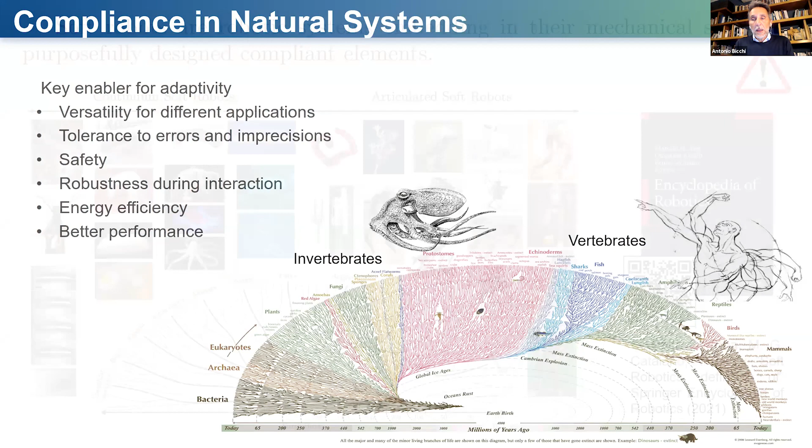There are different definitions of soft robots, but soft robots are machines that basically take inspiration from this ubiquitous feature of nature, having compliance. In a recent definition that Cosimo della Santina, Manuel Catalano, and myself tried to give of soft robotics, we considered that soft robotics can be of different types. Continuum robotics takes inspiration from animals that have no bones, basically invertebrates, while articulated soft robots instead take inspiration from vertebrates.

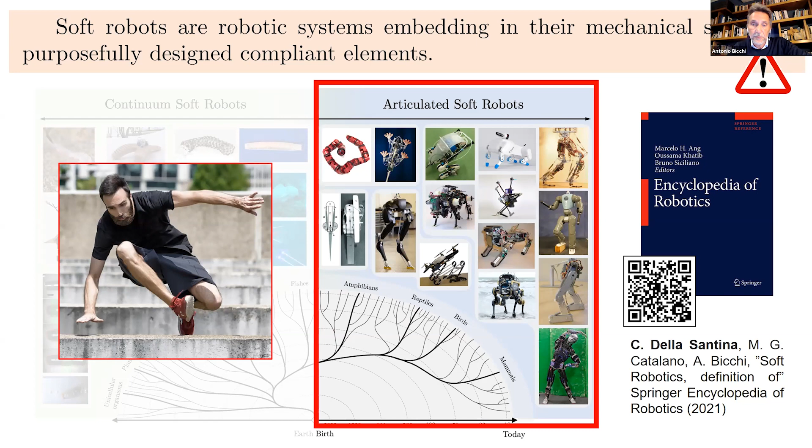In all cases, there are elements that define compliance and interaction. If you look at the human example, we have bones, but we also have muscles, and muscles are inherently compliant. They are characterized by force-deformation, force-velocity, and force-motor neural firing rate relationships. There are descriptive models in the literature, but it's still an open topic to exactly understand how the musculoskeletal system works in humans.

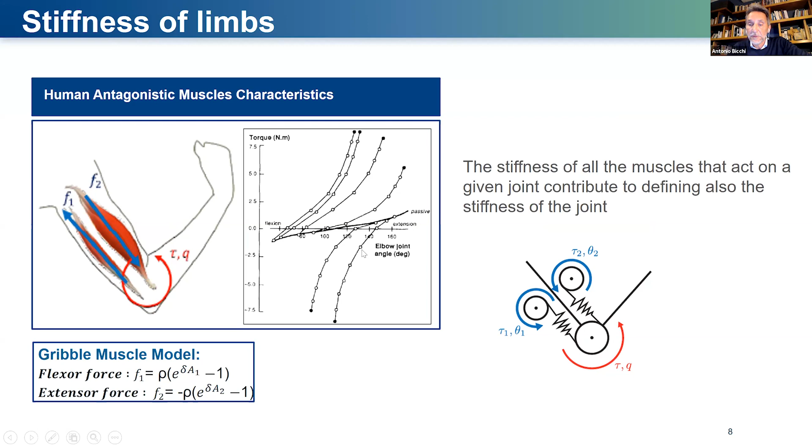The limbs have different stiffness because of their actuation through muscles. If you combine two muscles in an agonistic-antagonistic, push-pull configuration, the characteristics of the two muscles combine so that you can have different stiffnesses at different levels of activation.

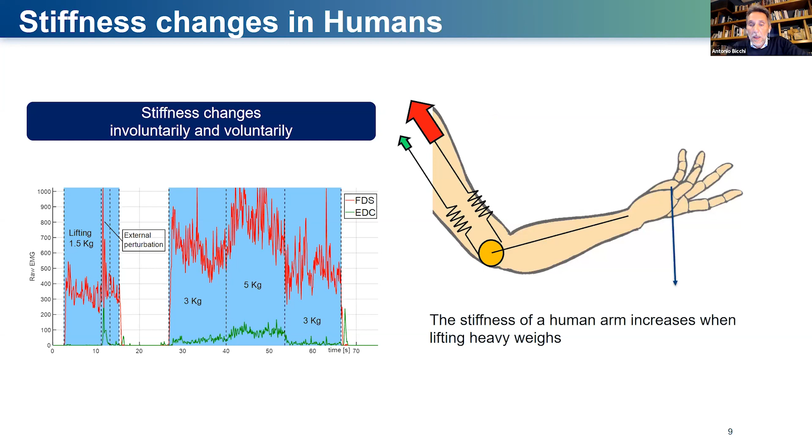Actually, humans change stiffness both voluntarily and involuntarily. When you lift a weight, you stiffen up, not because you want to, but because your system is made so that you increase your stiffness. But on the other hand, you can also change your stiffness without changing position and without having any weight to lift, if you co-contract the muscles in an antagonistic role.

This has been studied largely in the literature, and I'm very happy to have here one of the true pioneers of these studies, Neville Hogan, who as far back as 1984 started looking into this problem. The fact that humans change stiffness, change impedance, and use those changes for interacting with the environment in the proper way has been considered by many.

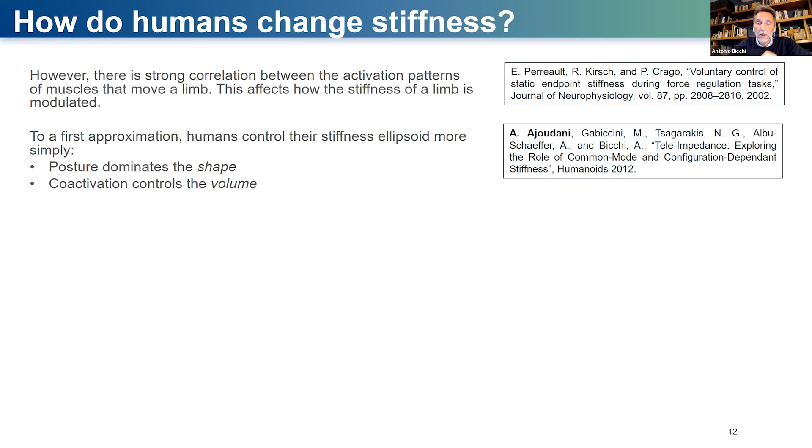So when we contract muscles, we tend to contract all of them together, and it's difficult for us to learn to contract some muscles but not others in the arm. So the configuration-dependent stiffness, as we call it, changes with posture.

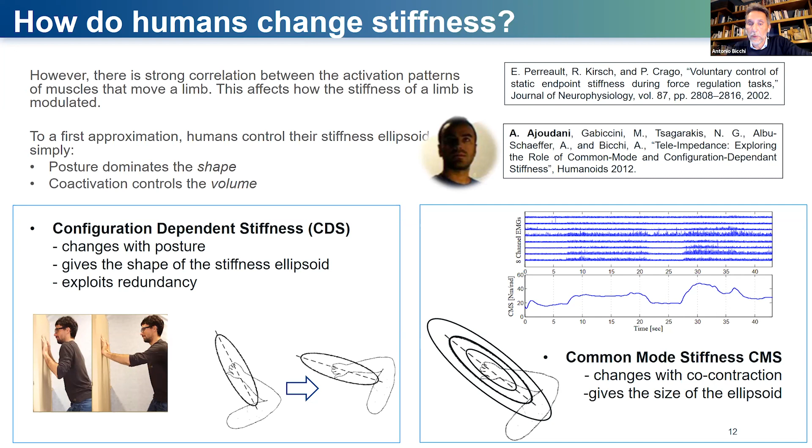This was work by Arash Ajoudani, a former student, now a colleague of mine, who did these interesting experiments where we see how the human ellipsoid, measured by perturbation from a robot arm, changes in size when co-contraction happens, but very little in direction—changing in volume, but not in shape.

Now, this much given about humans, let's see what happens in robots. Variable impedance in robots has been used and proposed for a long time. First, it was proposed and implemented in software with variable impedance control, and then there have been several attempts to also implement it in hardware, in variable impedance actuators.

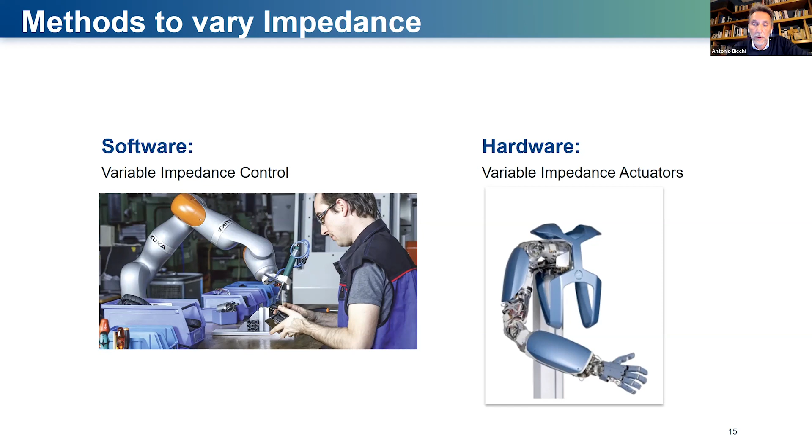Again, we can be inspired by nature and try to replicate that. For instance, I share with you here the design of an actuator that has two smaller motors inside, which you can see on the right, and a connection between elastic elements between them that makes its force-to-torque-to-deformation configuration very similar to the human one.

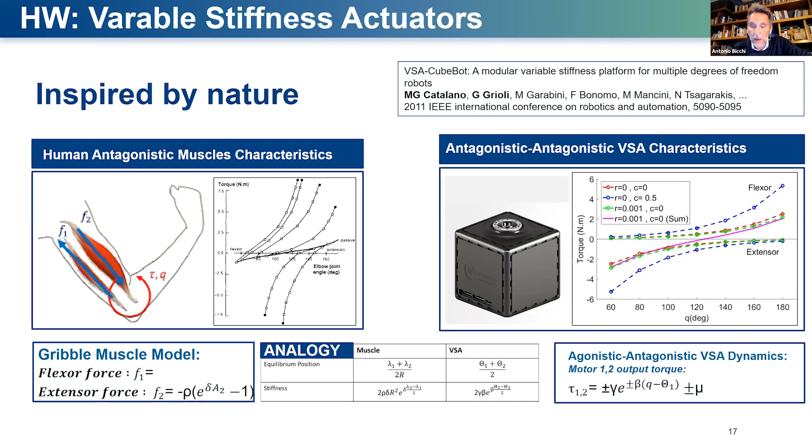By using these actuators, you can actually replicate the human muscle agonist-antagonist system in one degree of freedom. The actuator is actually rather compact, and it's now even a product of a spin-off company that you can use to simulate human impedance. This is work by Manuel Catalano and Giorgio Grioli, whom you see here.

Variable stiffness has been used for rehabilitation, for instance with exoskeletons. I mentioned some work from the University of Brussels for lower extremity exoskeletons. And in our own lab, we have done experiments using these cubes that I showed before for exoskeletons that can change stiffness, but also for this knee.

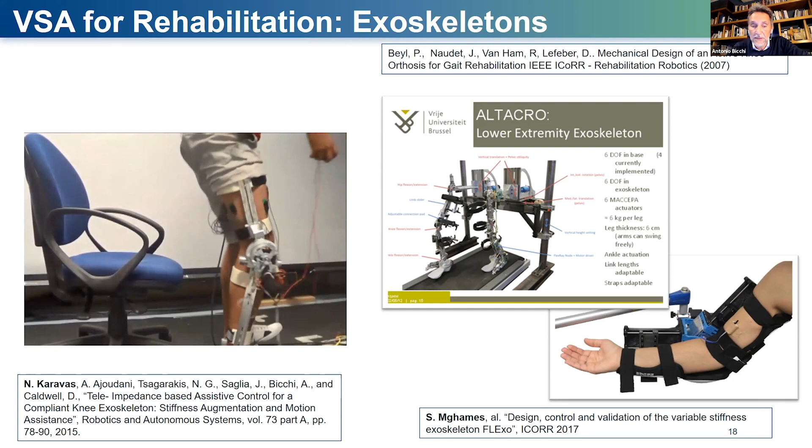In this case, you see that this exoskeleton is used to help the person lift. The idea is that when you need more force at the beginning of the standing up operation, you better have a rather rigid motor because you need to transmit all that torque. While when you are standing, you don't want the motor to mess up with your freedom of moving. You do not need much support, and you want to have as low impedance as possible when you are in the upright position.

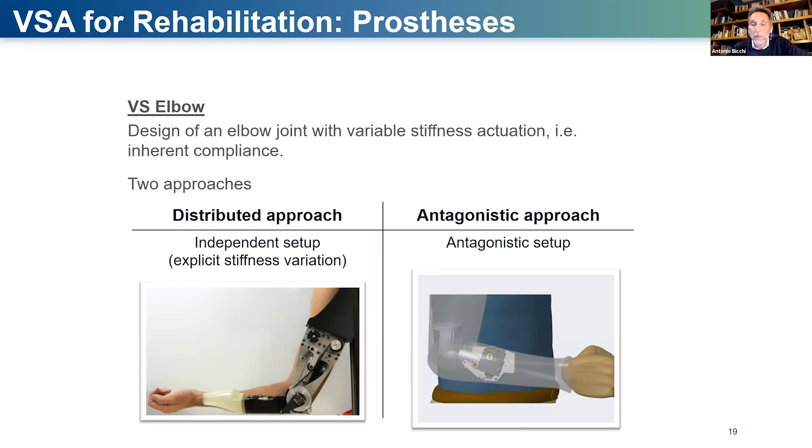Of course, there are other applications that we are working on. For instance, here is a prototype of an elbow for a prosthesis that has variable stiffness, and we are working on this. The effect of variable stiffness, as you can see in this example, is that you can absorb impact better, but with higher deformation. This is work by Simon Lemaire.

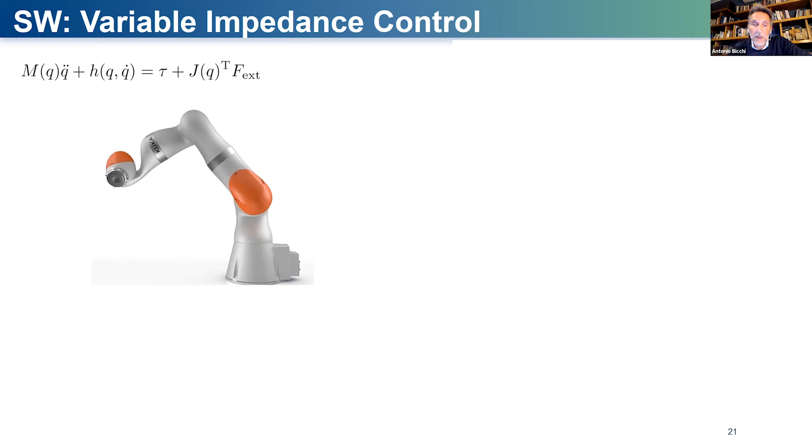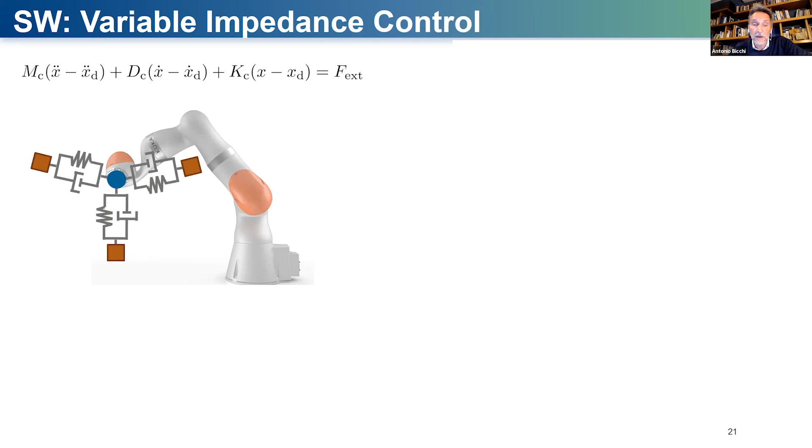The other possible approach to variable impedance is to use control, and there are by now fundamental, basic results about how to implement this. Basically, if you have an estimate or measure of the torques at all joints, you can implement a system that has an apparent impedance at the tip of the robot. This goes back to the famous work of Neville Hogan back in 1985, I think. This has been implemented in many robots in the labs, and recently even in industrial products.

Sorry. What happened? I went too fast. Yes.

In reality, there are a few things to consider about impedance control. By solving the equations of impedance control, I have here the simpler version, which goes under the name of stiffness control in the original proposition by Ken Salisbury. By doing the rather simple manipulation of the Jacobian and stiffness matrices, where Kx is the desired stiffness matrix at the end effector and J is the Jacobian of the manipulator, you can make the stiffness of a robot any given desired stiffness, provided you apply the right control. This does not depend on the configuration of the robot in principle, because you just take into account the configuration with the Jacobian.

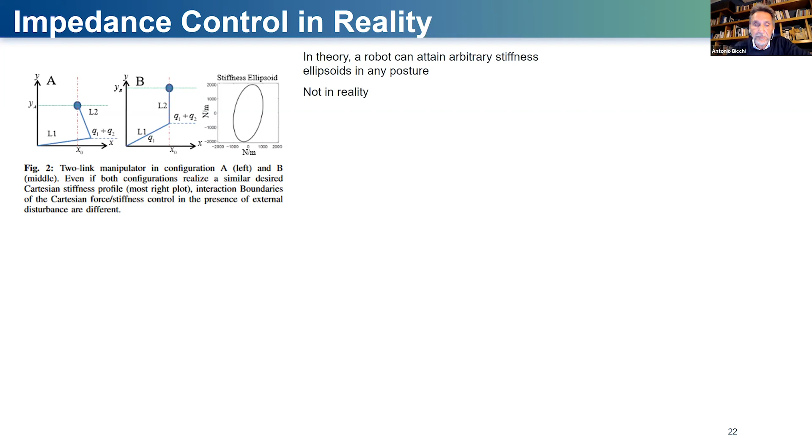So from this equation, it would seem possible to have an arbitrary stiffness ellipsoid in any configuration of the robot, as if it was not dependent on configuration. This, of course, doesn't make much sense if you think that humans do change their configurations to obtain different stiffnesses, as I showed with this picture. If you want to be compliant, you flex your arms. If you want to be stiff, you put them straight.

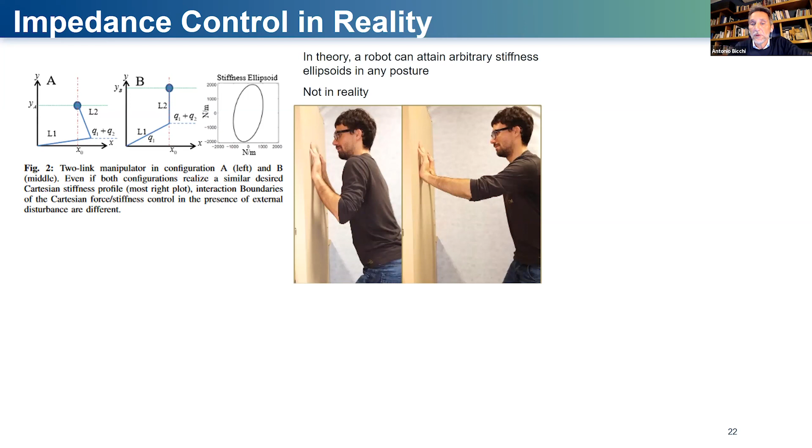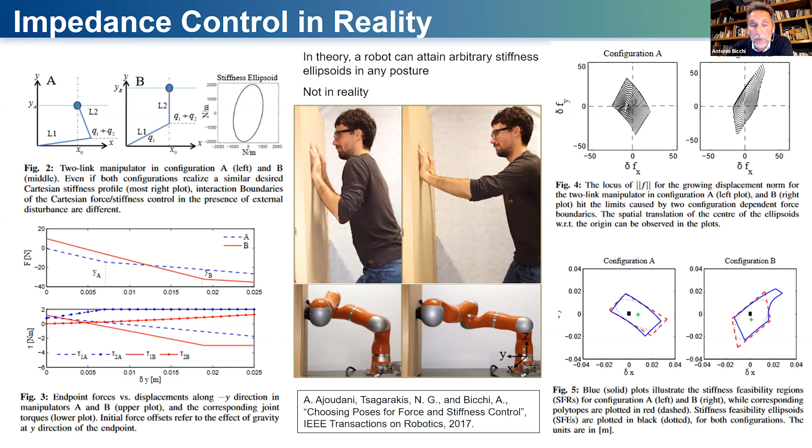This generalizes impedance control to non-small deformations, because you can then absorb larger deformation and larger forces with these configurations. And of course, you can change impedance to do different tasks, as for instance the very basic, very important peg-in-hole task that we will come back to again.

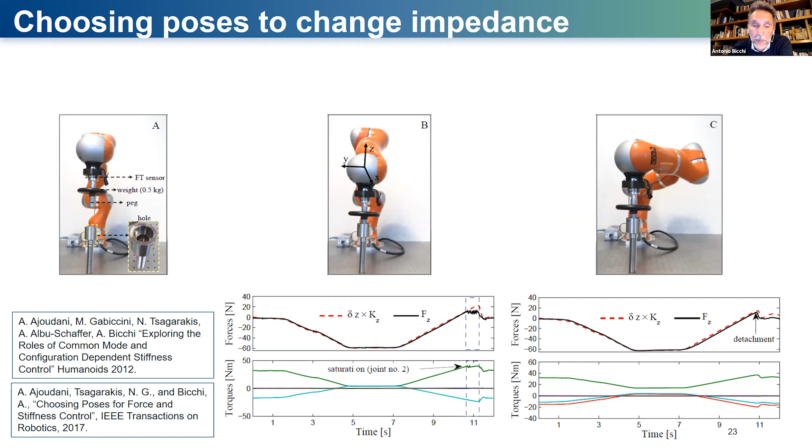One point now is how to use variable impedance. Variable impedance and soft robots in general can be safer, faster, more adaptable and more robust, but they are nonlinear. They very often are under-actuated. They come with lower control authority. They have higher relative degree in control theoretic terms. Therefore, they're more difficult to control.

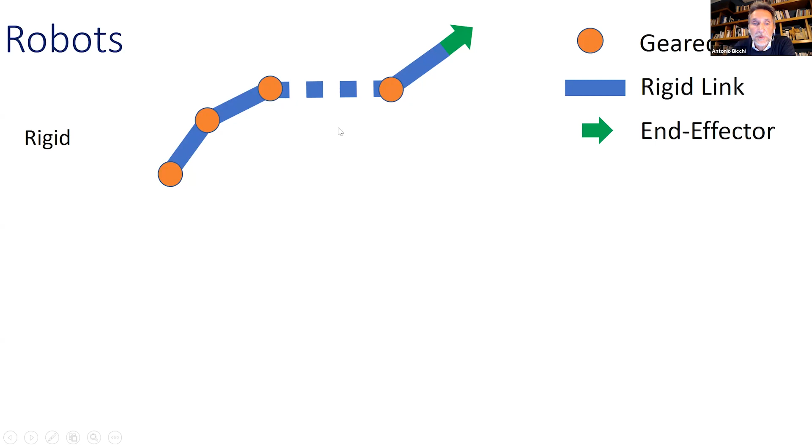Here is a little classification of different robots. A rigid robot is basically made of geared motors and rigid links with an end effector at the end.

Series elastic actuators are robots that are built with a flexible joint that has an actuator and a spring. It's called SEA, and rigid links. These have been historically the first prototype of soft robots proposed in the literature, by Gill Pratt from MIT in the mid-90s.

Then VSA is a mechanism where you can change the stiffness by hardware, basically using two motors whose combination can set both the equilibrium point and the stiffness.

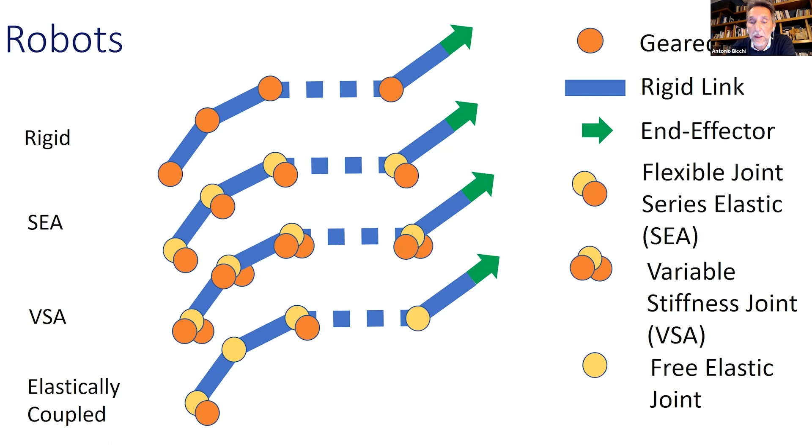You can have also joints that are not actuated, but they have an elastic coupling. So you have some joints that are not directly actuated, but elastically coupled, meaning they can include some free elastic joints.

You can have as many under-actuated joints as you want, with only a few that are actuated, for instance with SEA. You can also have robots that are free and under-actuated, so only dynamically coupled, like in the Acrobot or Pendubot examples from Mark Spong.

Finally, you have continuum robots, which you can see as a limit of a robot with many unactuated elastic joints and/or flexible links. It all depends on how you model these robots.

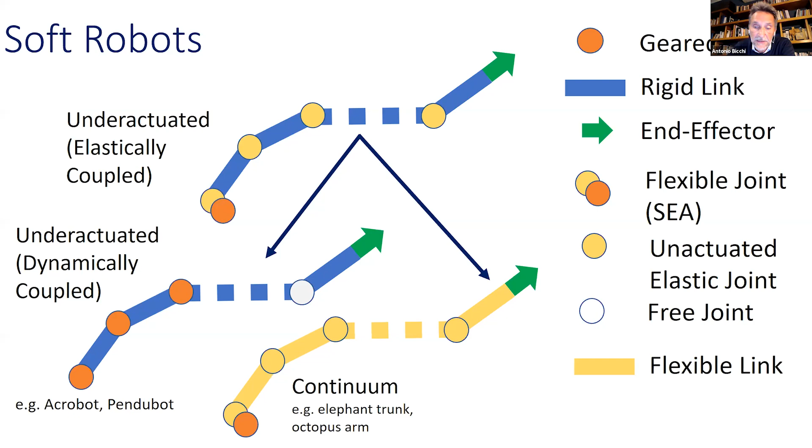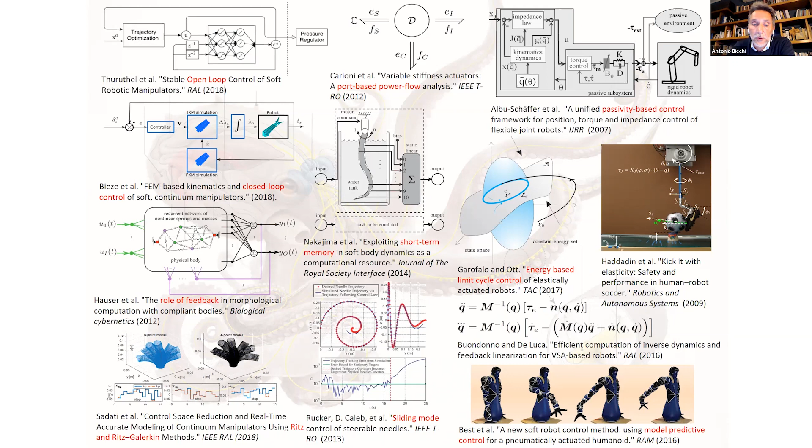To control these soft robots, many different controllers have been proposed. Here is a pictorial description of some of these methods, going in many different directions, from the most sophisticated nonlinear control, geometric nonlinear control, to neural nets, and of course many other approaches, both data-driven and model-driven.

Looking into the control properties of those robots I discussed before, you can observe some features. First of all, systems are controllable in their linearization, and all of those are input-output feedback linearizable with stable zero dynamics if there is at least some inherent damping, except for a specific class.

You can do collocated control pretty easily, although you can have low performance. You can do non-collocated control too. It's not impossible in theory, it's not trivial, but you can do it, so there are tools for doing this. However...

Feedback control of soft robots is not obvious. I want to share with you a very simple line of reasoning that I hope will make this problem interesting to you. Consider the simplest soft robot, which is a cart connected through a spring to a moving element. You move this robot by moving theta, the reference for this robot, and K is the stiffness. The system dynamics are trivial.

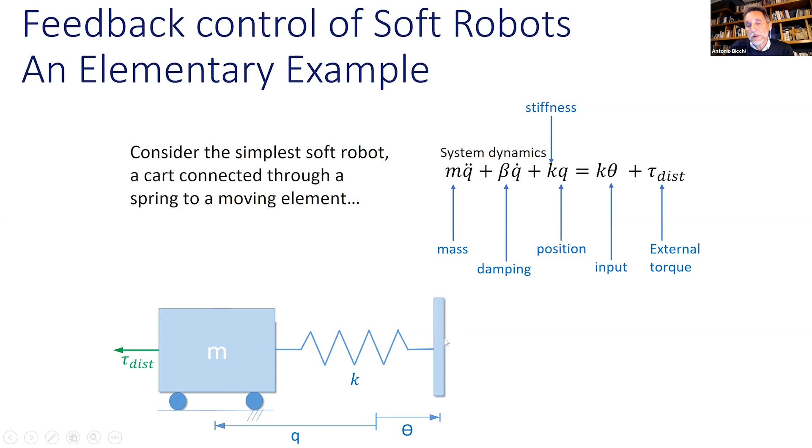You have a disturbance here, and you control the position theta. Now assume you do the simplest controller possible, a proportional control, meaning you set the reference theta to kp times the position Q, or the error. What happens is that the system dynamics are modified by this kp*Q term, and the effective spring stiffness, originally small k, is modified to k times 1 plus kp, where kp is the proportional control gain. So the closed-loop stiffness actually increases by a factor of 1 plus kp.

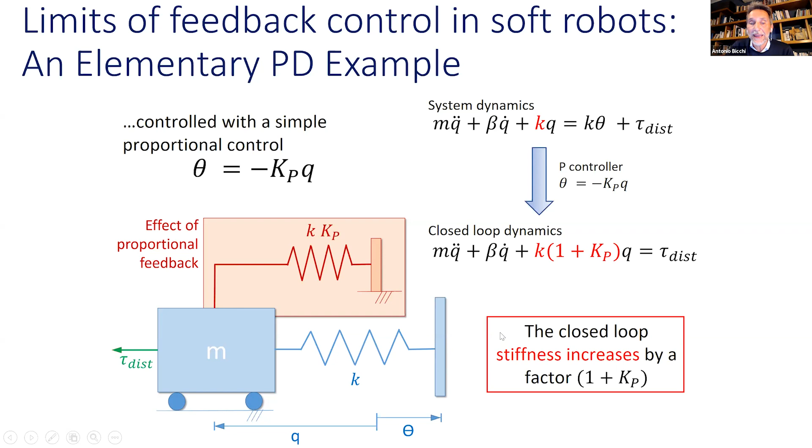The stronger you make the controller, the higher the gain, the stiffer the robot gets. You can see this with a little arm built with variable stiffness actuators, controlled in a very soft configuration. When it hits an object, because of the gain that keeps dragging the robot towards the goal, the robot actually becomes stiff, even though the original setting of the joints was to be soft. This clearly defeats the purpose. If you design a soft robot and then control it so that it becomes stiff again, why did you design it soft in the first place?

You might say, that was just a naive controller, if I do a better controller it won't happen. It turns out that's not true. I'll skip some of the mathematics, which aren't very deep anyway, but you can show that for any control law that feeds back position and outputs torque, the variation of stiffness imposed on the soft robot can be described by a neat term: the difference between the derivatives of the torque generated with the controller and the torque generated in open loop.

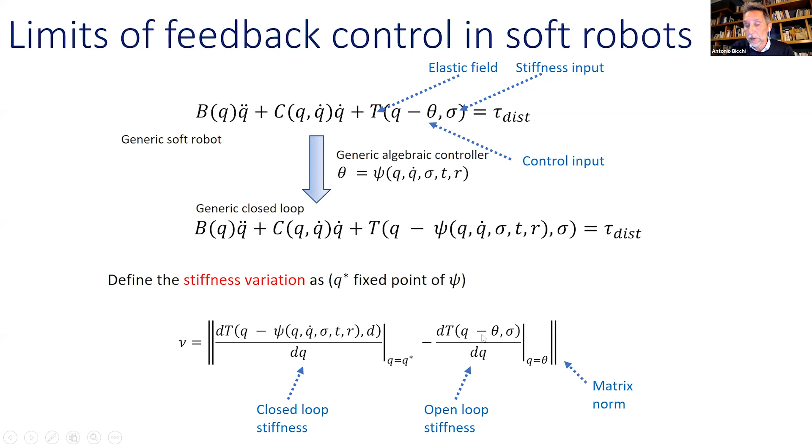This change in stiffness can be bounded by a given value delta only if the gain of the controller is lower than delta times the stiffness of the robot. This means that if you have a soft robot, you cannot change its softness too much. If you want to keep the stiffness low, then you cannot have gain in the system, whatever controller you put. The steady state gain has to be low.

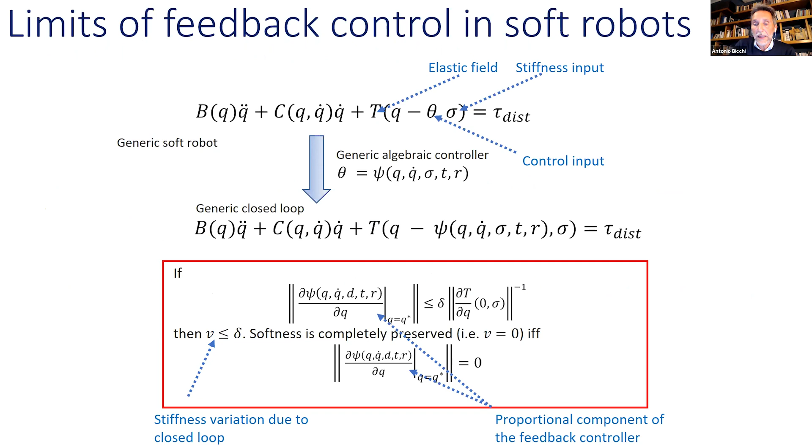This means that basically you cannot do much in terms of using the gain. And of course, I think the easiest example of a controller that should not be used with soft robots is feedback linearization, which is a very strong, very, very powerful method. But see what it does.

You start with these simple dynamics, or any more complex dynamics. You feedback linearize, meaning you cancel all nonlinearities and reduce it to a model where basically your input action equals the highest derivative in the system. So you have one input that goes to the fourth derivative in this soft actuator. You simply map your new inputs to the fourth derivative of some states.

Now, the question is, what is the physics? Where has the design of the soft actuator gone? This model is equal for all devices. These devices have been designed carefully, with some cost and effort, to be soft. So if you do feedback linearization, every robot is the same — there are no softer or stiffer robots.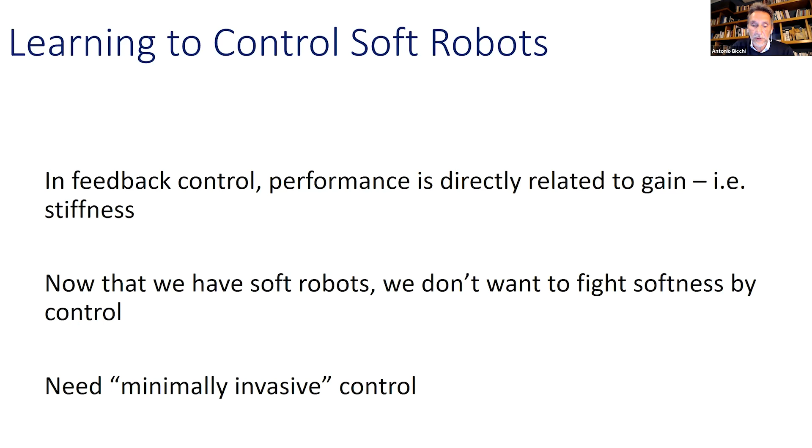So in feedback control, to sum up, performance is directly related to gain, that is, stiffness. In a sense, if we want to have soft robots, we don't want to fight softness by control. One of the interesting things that soft robotics introduced to our discipline is that you cannot rely on classical control — you rather need minimally invasive control, if you allow me to use this term.

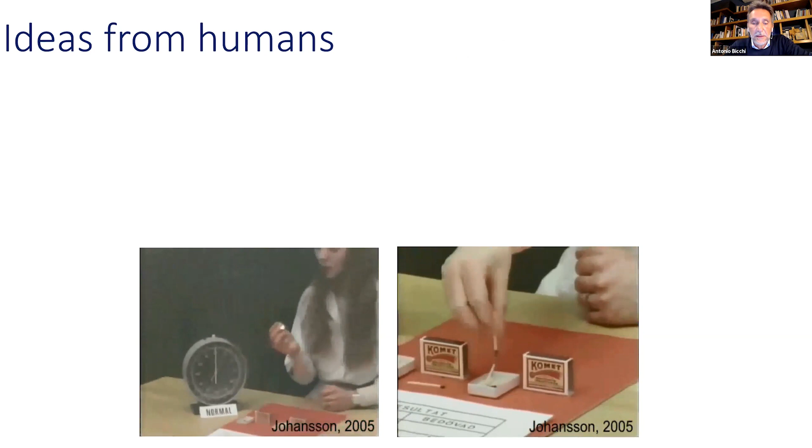How can we do that? Some ideas may come from how humans control our own bodies. If you see these videos that Roland Johansson proposed a few years ago, you can see how a person who has been anesthetized in her fingertips initially...

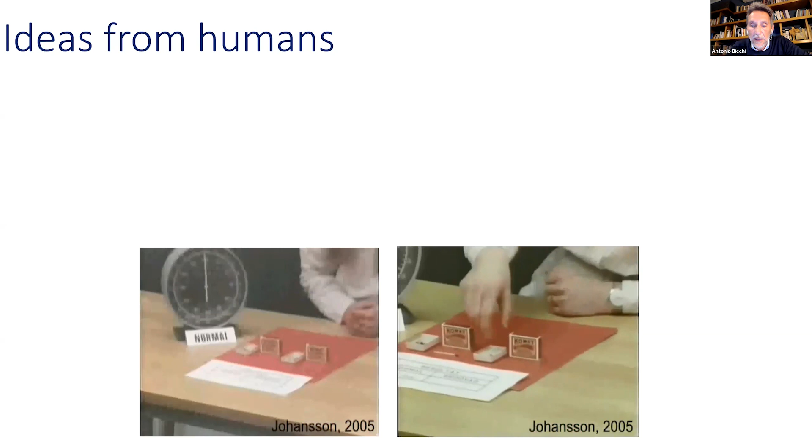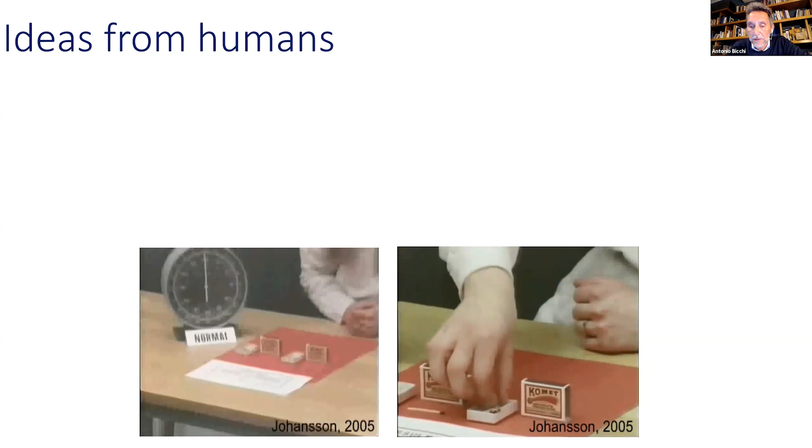...because she's lost tactile feedback, is initially in difficulty in the task of striking a match. But after a little trial, less than a minute, she can manage again all the motion control that is needed there.

So if you look at the paper by Roland Johansson, you see that back in 1984 he already had it very clear that sensory-motor mechanisms involved in motor control depend largely on predictive rather than servo control or feedback mechanisms. And that is key.

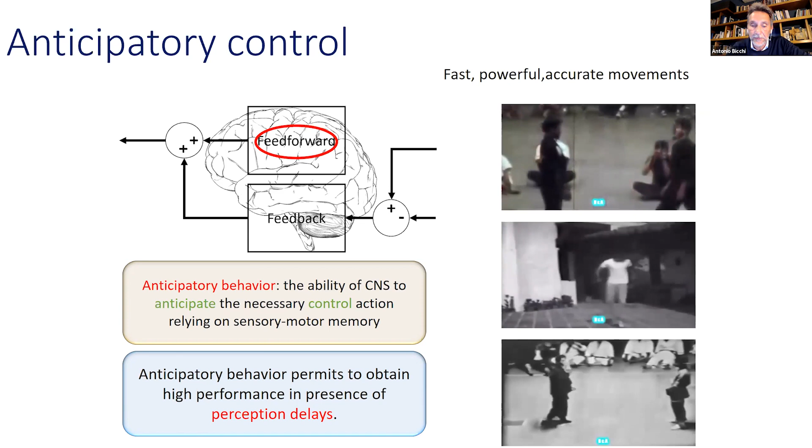So anticipatory behavior, or anticipatory control, or feed-forward control, is an important means that we learn in our early life, or even later on, to perform fast, powerful, and accurate movements, even in the presence of perception delays.

So how can we do this minimally invasive control, exploiting anticipatory control for soft robots? There are two basic approaches: one is model-based, and one is data-based, not surprisingly today.

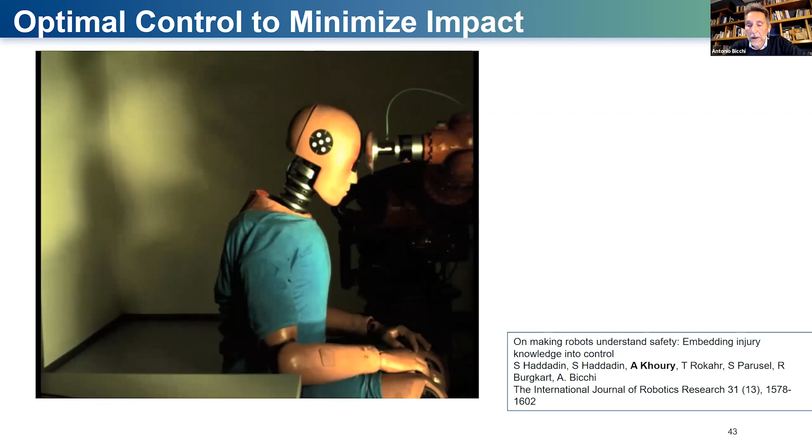The idea that you have a robot with a rotor inertia, a compliance, and a link inertia, and a person that can be hit, was formalized as an optimal control problem, with a constraint that the impact, anytime it happens during the operation, shouldn't make too much damage to the person. So it's basically a brachistochrone problem: you want to move the arm from here to there in minimum time, but with safety limits.

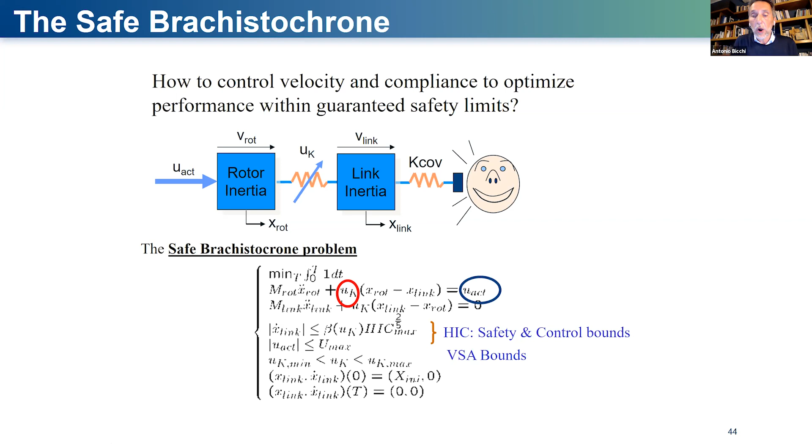Along the trajectory, you don't want to be dangerous. Not to be dangerous, you either have to go slow or have low inertia. By acting on the variable stiffness of a robot, you can reduce the effective inertia at the link, because the rotor inertia is multiplied by the square of the gear reduction ratio, and therefore has a strong impact on the effective link inertia. So by changing both the stiffness and the torque at the joints, you can try to optimize for those values.

In some work that we did already many years ago, we showed that the optimal policy, by solving that optimization problem, is that you start a motion slowly, go fast, and finish slowly, just as in most profiles of motion that you have in robotics.

But if you look at the stiffness, that is more interesting. You want to be very stiff at the beginning when you're slow, and as soft as possible when you are fast, and then go back to stiff when you slow down. If you do this policy, this method can beat basically both a rigid arm, a SEA arm, or any other combination.

So the idea is basically fast and soft, stiff and slow, for being safe and as fast as possible. But still, in the perspective of optimizing the choice of impedance for a task, there are different tasks than just moving from A to B in a safe condition.

There are tasks where you don't want to be safe, tasks such as hitting a nail. You want to minimize safety, actually. You want to maximize impact. So you ask yourself, what is the optimal impedance profile that I have to apply on the robot to maximize the impact on the nail? You want to have max speed at free terminal time.

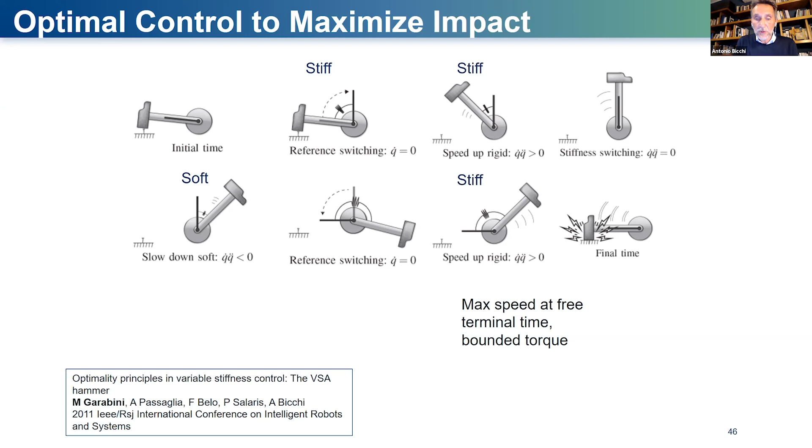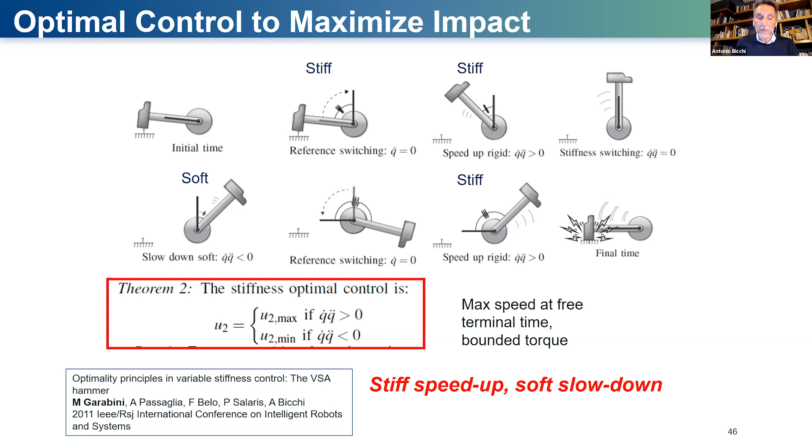It's a bounded torque problem. You can try to solve it with optimal control, and you find that the law tells you that you have to be stiff when you accelerate and soft when you decelerate. That's a very simple lesson that you learn from optimal control in this case. You want to be stiff when you speed up and soft when you slow down. This was a result by Manolo Garabini and others, 2011.

If you want to solve the other problem, which is maximize damping—so you have an impact and you want to damp it down—then not surprisingly, the policy is exactly the other way around. You want to be soft when you speed up and stiff when you slow down.

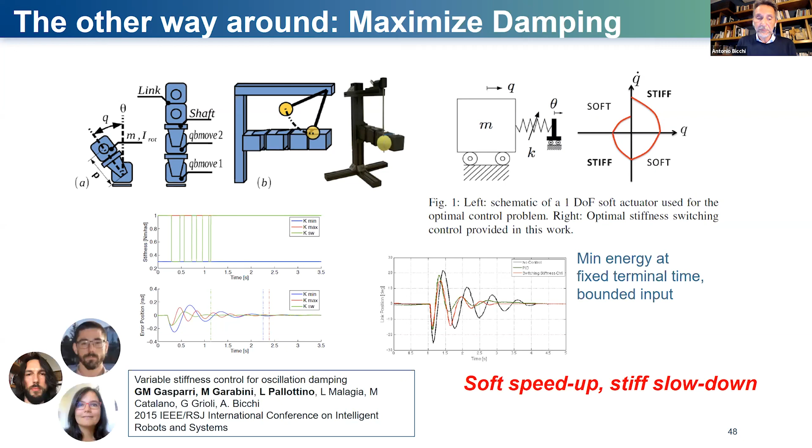This was work with Gian Maria Gasparri, Lucia Pallottino, and Manolo Garabini.

Another important application of this is when you want to interact with the environment. What stiffness should you use to interact with the environment? Assume that you want to press against the environment, and the environment has a curvature. In some cases, the curvature can generate instability.

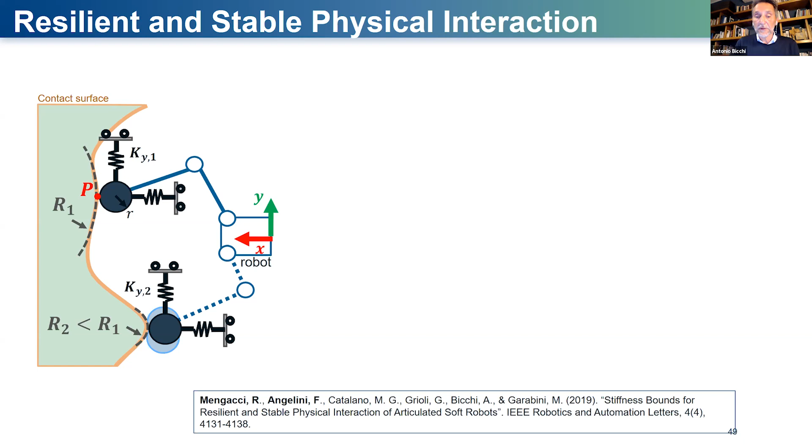For instance, on the lower interaction scheme, you see that a higher curvature can make the endpoint of the robot deviate from the normal position and go on either side of the bump. So there are issues with instability, resilience, minimum force to achieve the task, and positioning error. There are some stiffness bounds that you can apply related to uncertainties, contact surface curvature, and interaction forces.

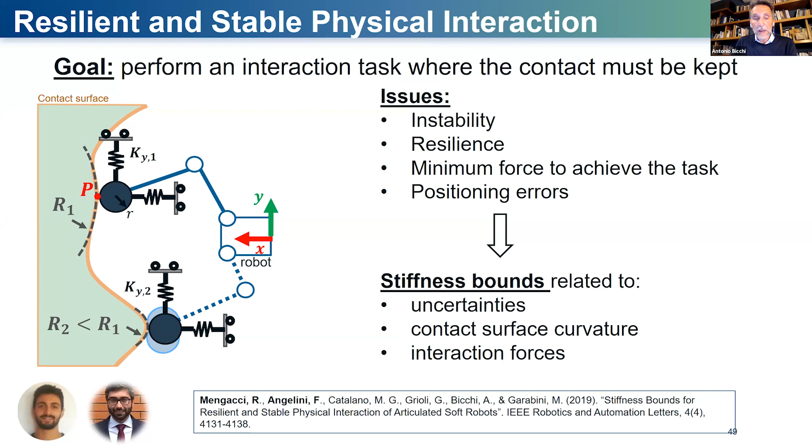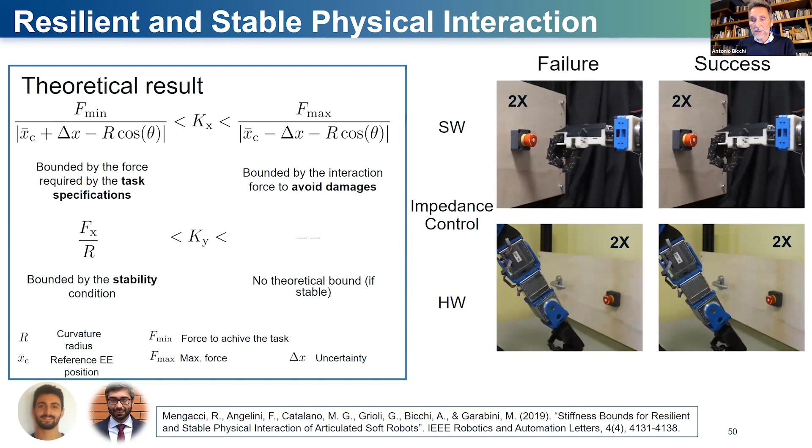In this more recent work, 2019, by Riccardo Mengacci and Franco Angelini, there are quantifications of the limits that you can have. The experimental implementation also shows that you have lateral instabilities when pushing, for instance, this button, if you don't set the impedance right.

Okay, so far so good with model-based approaches. You can do optimal control. In some cases you can solve it symbolically, in some cases you have to do it numerically—in most cases you have to do it numerically. Sometimes you learn good lessons, but in many cases the problem is just intractable. And in some cases, you don't have a model good enough to apply optimal control.

So how about learning the anticipatory control that you have to apply? The idea is, for instance, that you can repeat a given action with the robot and look at the outcome. At the beginning, you don't know very well how to move, how to control the robot. So you control the robot along a trajectory, you see that it's not working well, you look at the error between the execution and what you would have liked to have, and you change your control.

So you do a next iteration, you try again and again and again. Basically, the control that you apply at the i+1 iteration of your trials is a function of the last control that you applied plus proportional to the error that you measured in the execution of this experiment. This is called iterative learning control. It's been around for quite many years in robotics, and you see here is a forgetting factor.

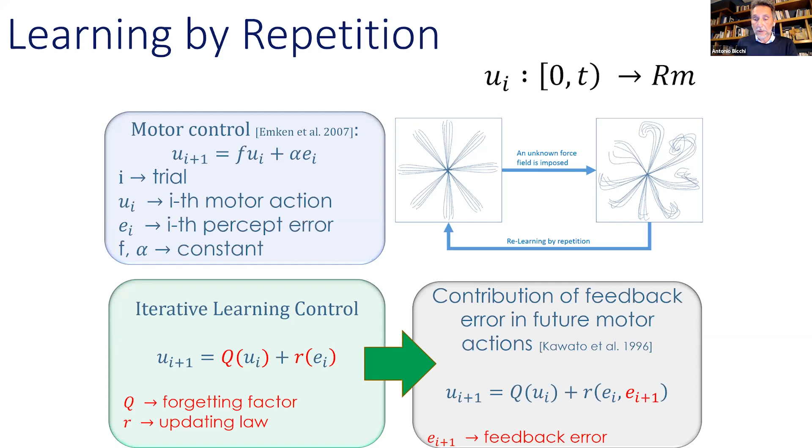Basically, the new control is the old control with a forgetting factor, because you don't want to stick to the old one, plus a term that depends on the error measured on the last iteration. There's also a variation proposed by Mitsuo Kawato, where the updating law also depends on the current error during execution. This is feedback: the calculation gives a better approximation of the feed-forward action, while these terms allow using feedback during execution. This makes the system very general—you have both feed-forward and feedback.

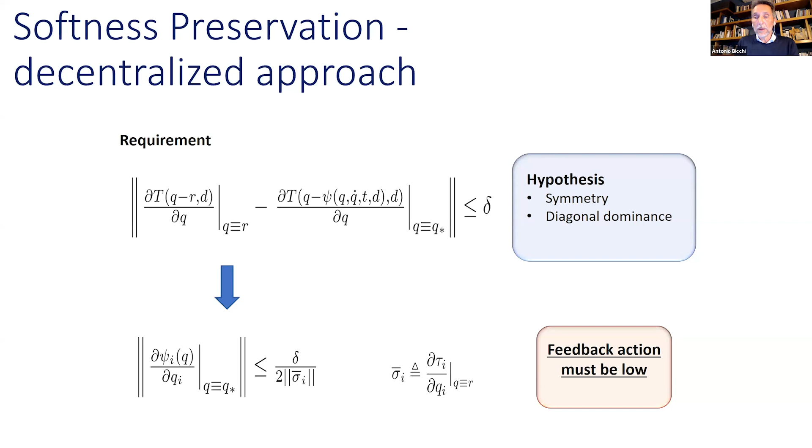Now we want to use this approach to control the softness, and also do that in a decentralized way so that you can control each joint independently. That you can do if you have diagonal dominance, which implies the feedback action must be low. Let me skip some details in the interest of time.

Let's come to the paper by Cosimo della Santina, Matteo Bianchi, and others that settles this question, where you can find the references. Here is the scheme that uses the information we have to converge to a controller that little by little improves on former iterations and learns how to do the control while keeping the feedback gain very low, so you don't perturb the softness of the robot. Basically, you keep the soft robot soft, but execute the motion correctly.

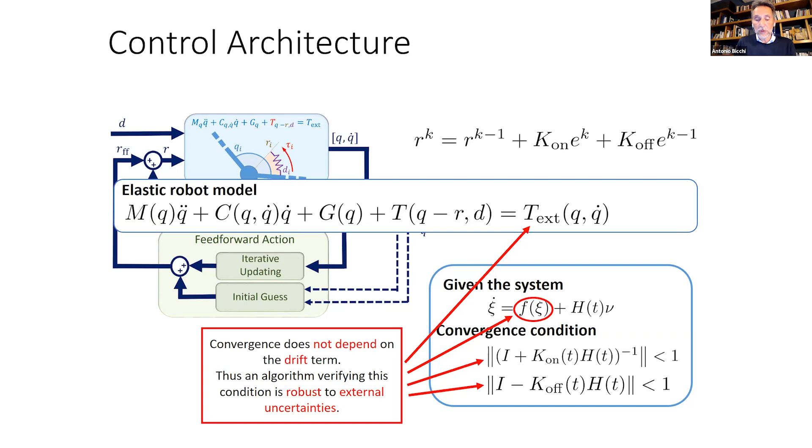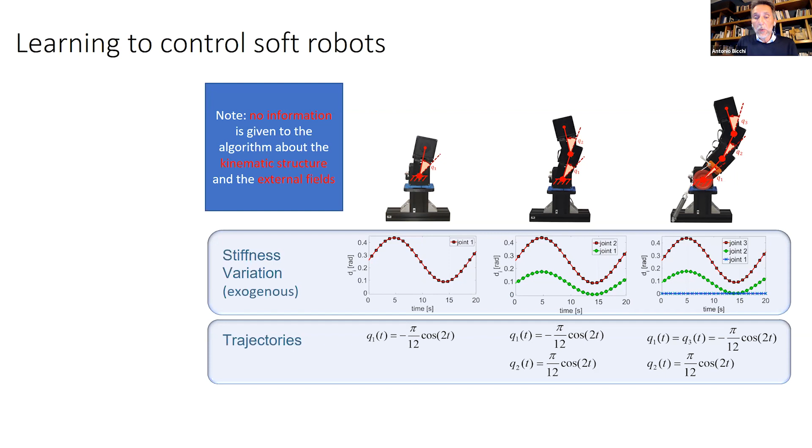Here are some experiments where the stiffness variation was imposed from the exterior, while the robot could still perform the trajectory correctly, notwithstanding the stiffness. And here is the implementation.

On the left, you see the experiment that was failing before. On the right, you see that these learning algorithms can perform correctly if there are no objects, and if it's set to be soft, it stays soft. On the top right, you see the robot remains soft. Let me start this again—indeed, it stops in front of the object, although the error is increasing, because the gain is very limited.

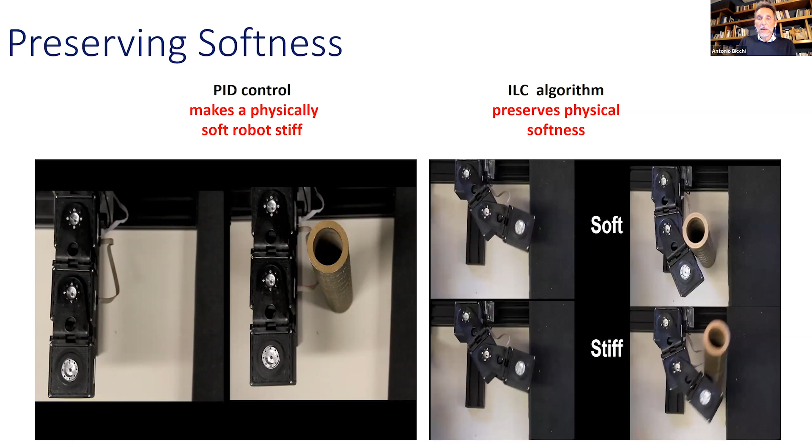So this is interesting for many reasons. One is that we can control a soft robot without making it stiff through control, but also because there is some deeper theory recalled in the background.

There was a fascinating paper by Roger Brockett, one of many of his fascinating papers, several years ago, on minimum attention control. Brockett looked at this functional of the control, a function of the state and time, and the derivatives of the control with respect to state, and with respect to time. He calls the derivative of control with respect to time, or a norm of this operator, a measure of the feed-forward action, and the derivative with respect to state a measure of feedback. The dependence on state is feedback, and the dependence on time is basically the pre-programmed variations.

Brockett pointed out that people, when starting to learn physical skills, use a lot of feedback at the beginning. Think of a piano player—that was exactly the example Roger used to give. When you learn to play piano, you look at your fingers and pay a lot of attention to tactile feedback, executing mostly in feedback. But as you learn, you go more and more into feed-forward, and release the attention to feedback.

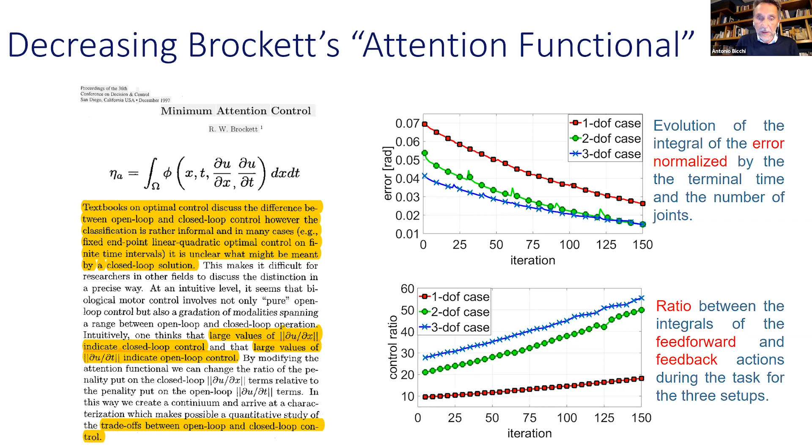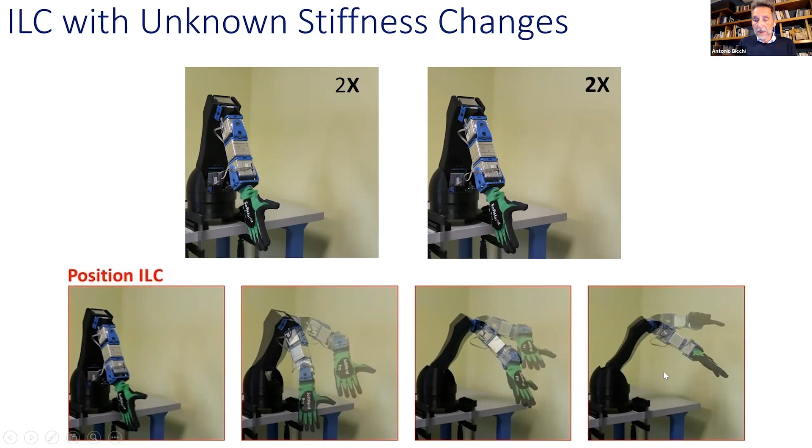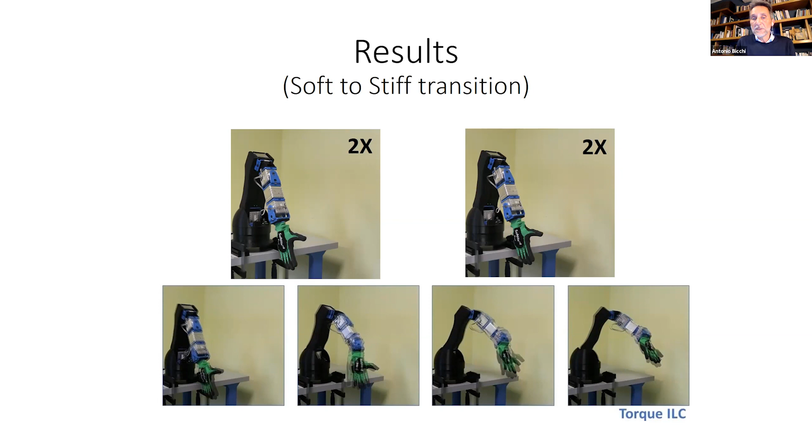But if you learn the right thing, which is the torque needed to apply the current motion, then you can see in these animations that the robot executes the trajectory correctly, whatever stiffness it is presented with. So it learns with, let's say, soft, and then executes with stiff, and still the correct motion is achieved.

And here is a comparison. The results are mainly due to Riccardo Mengacci.

So what messages can we take home? How can variable physical impedance of soft robots be exploited usefully? Data-based control tools use experimental data to build an empirical model of the system. It has high robustness until the system is changed. There is little insight that you get, unfortunately.

And the open problems are that many data are needed. That implies long learning time. You have to try many times, like tens of times, before you can execute rather accurately. And of course this implies that the robot wears, parts break, and so on.

Also, the problem is how do we generalize what has been learned to new cases? If I learn to do a number of operations, can I interpolate the lessons I learned to do something I never tried before?

Of course, to increase the robustness of data-based approaches to robot environment changes, you can think of merging model-based and data-based approaches.

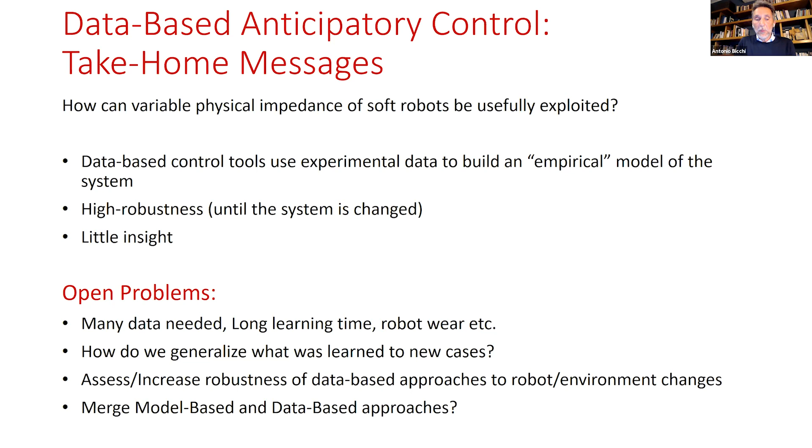Another interesting evolution we are now trying to use is the so-called sim to real, which is using simulation to learn real control. Articulated soft robots are partly there — some simulators already exist for series elastic actuators, some in Gazebo and ROS, which are C++ libraries of kinematics and dynamics for such actuators. But if you have variable stiffness, there is none that we know.

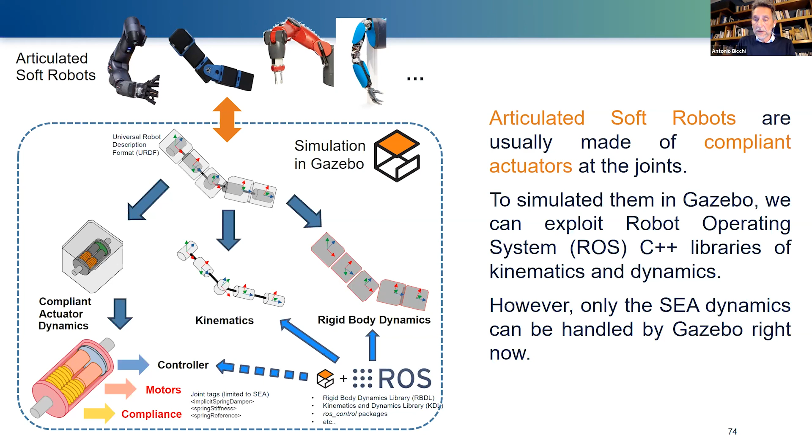So recent work by Riccardo Mengacci and Grazia Zambella has created a new tool in Gazebo for doing realistic simulations of variable stiffness, variable impedance robots. And you see here that the simulation is rather close to reality.

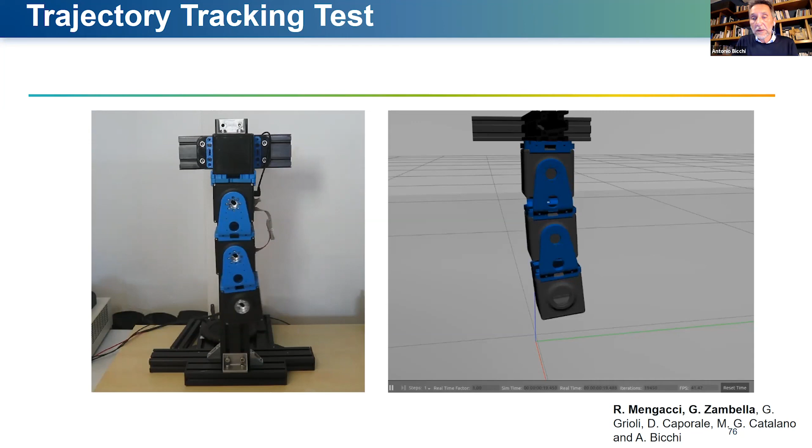So if you can develop very good simulations, then you can think of teaching a simulation, and you can do that for as long as you want in the background on computers that can be very, very fast, and then apply the learned lessons to the real robot. This is a very recent experiment that Riccardo and Grazia did.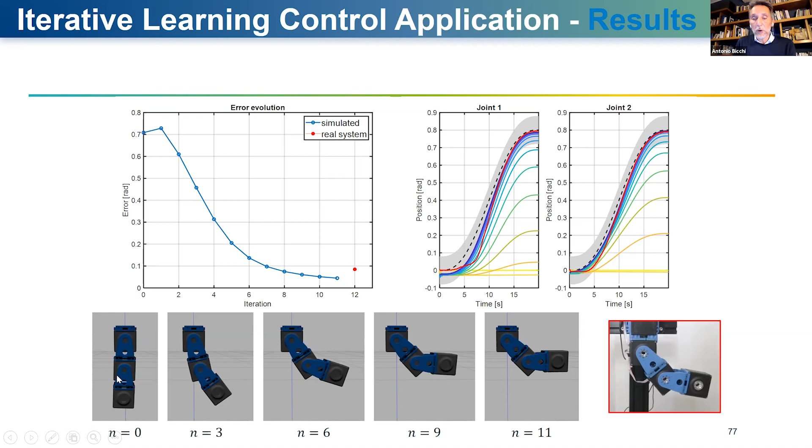So it is possible to learn, but of course we had a very good model of reality here, and that is not always the case.

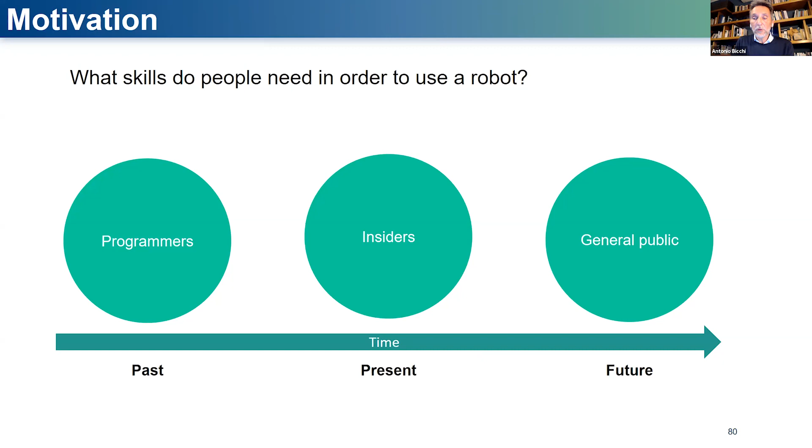So coming towards the conclusion, I want to touch on learning more complex tasks that are around. We need to learn not just moving, but doing more things. And we want robots that can be used not just by programmers, not just by insiders, but by the general public, common people. So how can we do that? Of course learning takes a long time, as you remember from the experiments in grasping from Google.

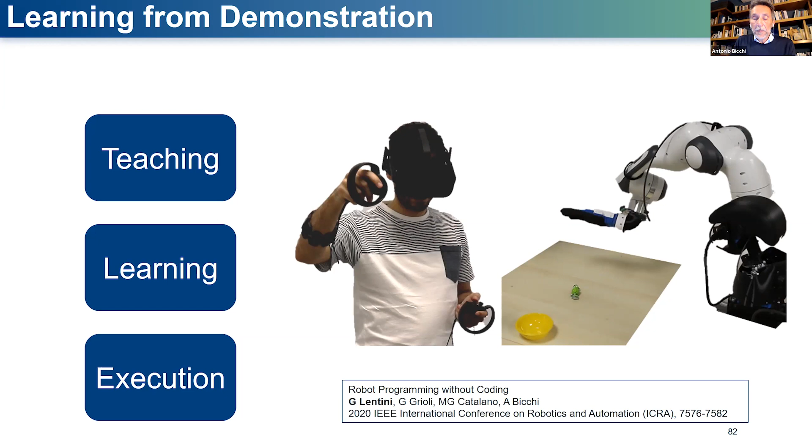There are other approaches, for instance learning from demonstration. There is some work that Gianluca Lentini is doing recently that tries to learn just like kids do, by showing them once, at most twice, a task, and trying to repeat it.

So here is a setup. Gianluca is here wearing very simple interfaces to control the two-arm robot with a head. The head copies the motion of Gianluca's head, and the arms copy Gianluca's arms. We also have EMGs to measure muscle contraction at the arms. Here is Gianluca, and here is the operation.

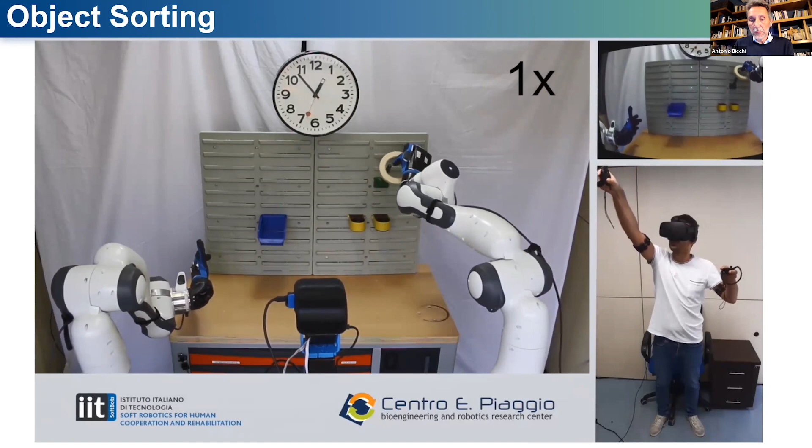So the first thing is you teach the robot to take this tape and put it in the final position on the green bar. If you do it once, you shouldn't need to demonstrate that again. Of course, even if the initial position is not the same, the robot should be smart enough to do that again.

And there is actually little that you need to do in order to make the robot understand that two tapes still go on the same bar, even though the bar is no longer where it used to be.

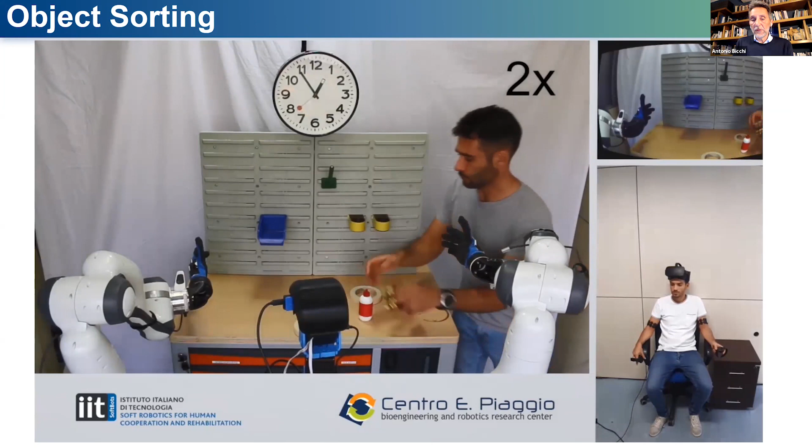Of course, if you have new objects, then you have to teach the robot where the new objects go. And this can be done very simply, and then executed again by the robot. I will not go too much into the details of how the method works, but it's a very basic learning by demonstration algorithm with some variations that I will mention later on.

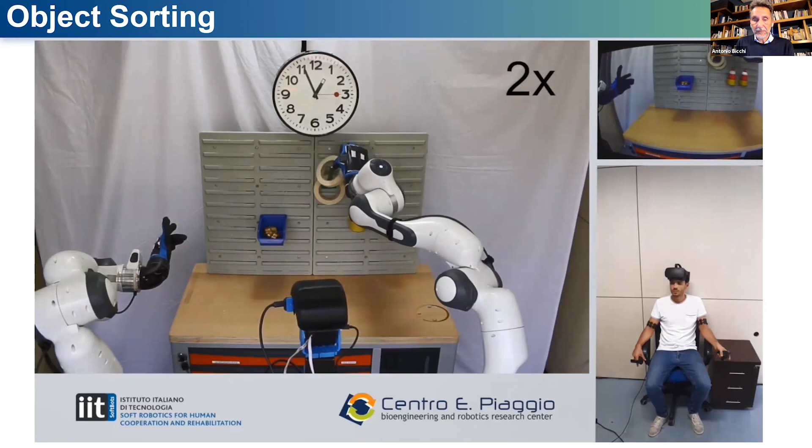Of course, once you have learned an operation, you can repeat it, even at twice the speed, as you see on the right, whatever is the initial position or final position of the goals. Now, today's topic is to have interaction.

So think of teaching the robot by the same method to put this peg into the hole. You can use a stiff robot, and then the person is now looking at the robot and inserting the peg in the hole. He can do that because he is a human and he knows how to do it. So it has a successful demonstration. But when you repeat it autonomously, the stiff robot is not able to do it again, basically because the interaction forces are too high and it gets stuck.

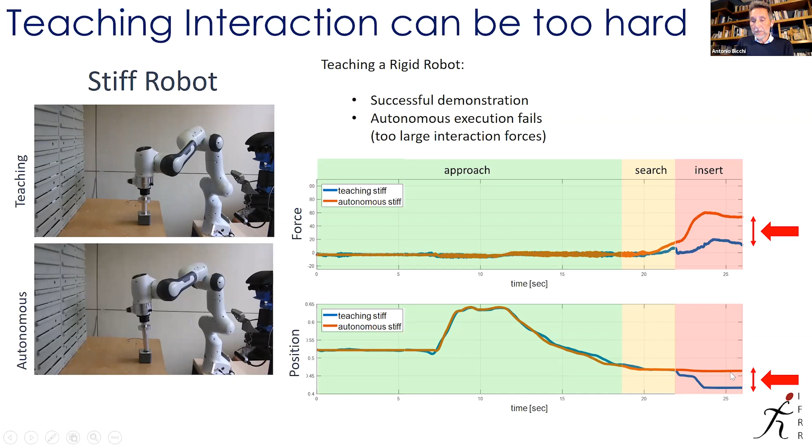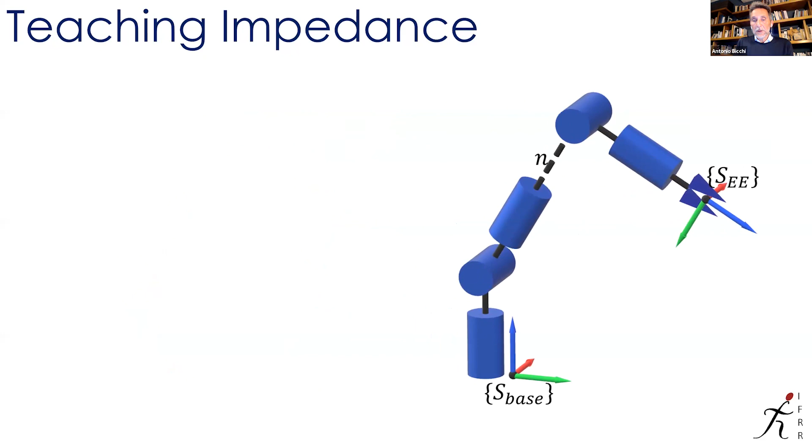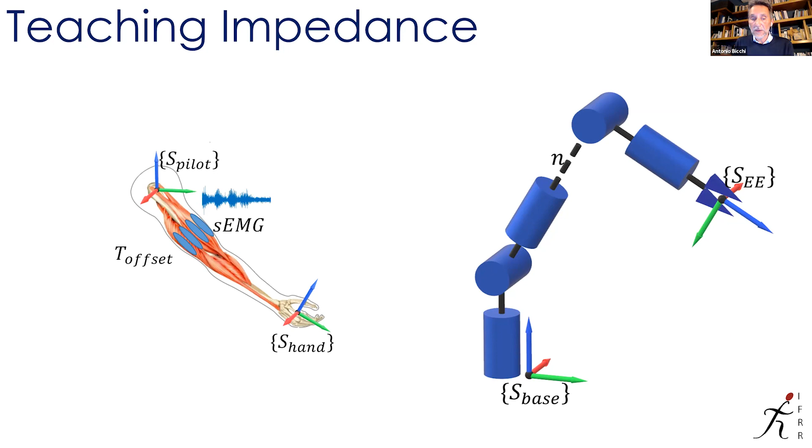What can we do? Can we have a variable impedance, and can we also teach the variable impedance? So the idea is that you have a robot and you have the person. We can measure the impedance of the person, both by looking at his configurations and by looking at his co-contraction level, the contraction level of his muscles, the activation level of these muscles, and or her muscles.

And then you can work on the scheme that basically is an alignment of the perceptual cues that you have along the execution by the human. When you demonstrate not just the postures, but also the impedance. And the saliency points during the operation tell you when it's the time to change a given posture or to use a given impedance. So if you apply this, then the person can change the impedance. The impedance is measured during the demonstration, and the demonstration is successful.

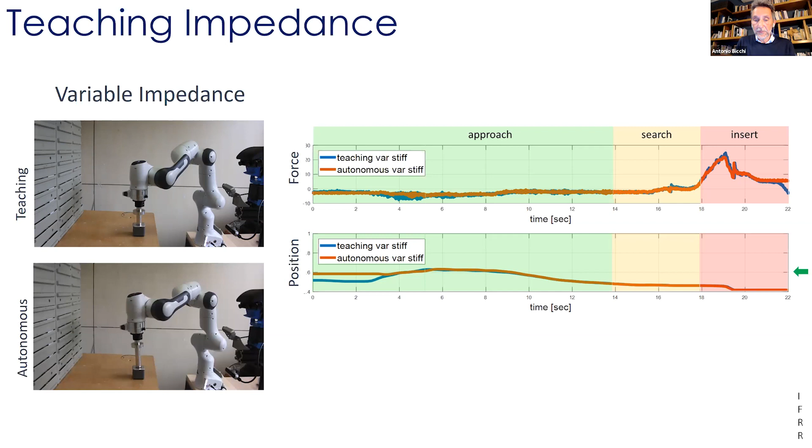But also now, during the autonomous execution, the robot uses the right profile of impedance in the different phases of the operation. And you see here that not only the forces and positions are now matched, but also the stiffness of the person is matched during the task.

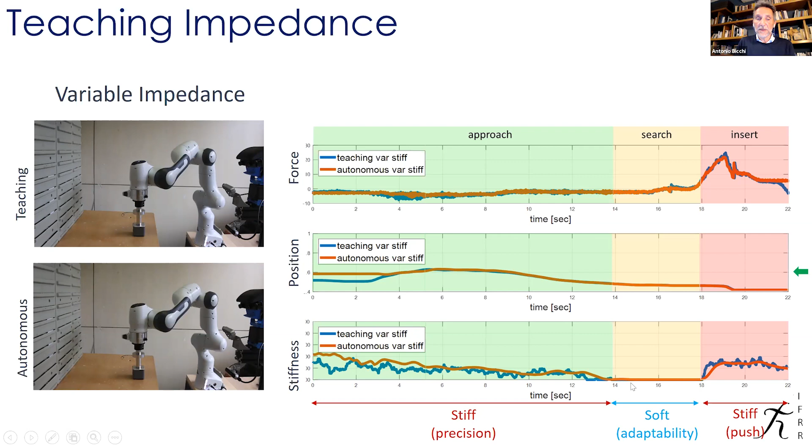So with this, I close my talk. I've been a bit long.

There are many open questions that are left. Of course, variable impedance control comes at a cost. If you have hardware, then basically you have twice the number of actuators if you want to have variable stiffness. If it is in software, you still need force sensors, you need better hardware or open architectures. Very few industrial robots today have programmable impedance.

It comes at a cost, so it makes you ask the question, is it really worthwhile? When is it worthwhile? And I think that this question is not completely solved yet. There are many like us who believe that there are cases where it is worthwhile.

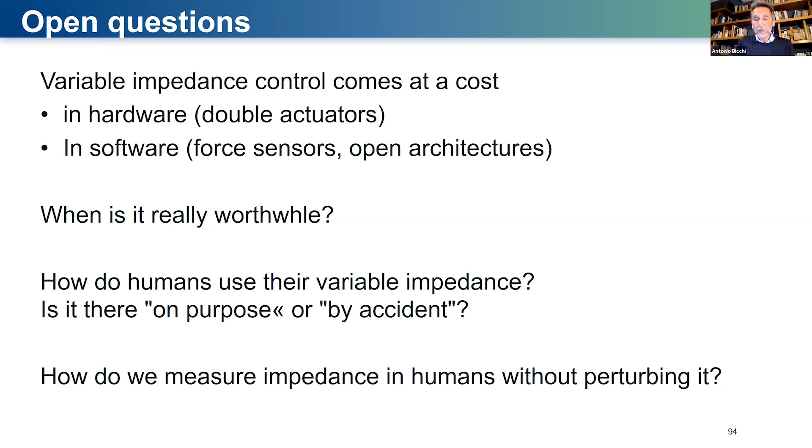A final important question is that it would help us to answer this question if we knew exactly how humans use impedance. To do so, we would have to measure impedance. But unfortunately, measuring impedance in humans is not easy. The only method we have uses perturbations. There are no methods I know of that can measure impedance without perturbing motion, and to do that in real time. With this, I would like to close the presentation.